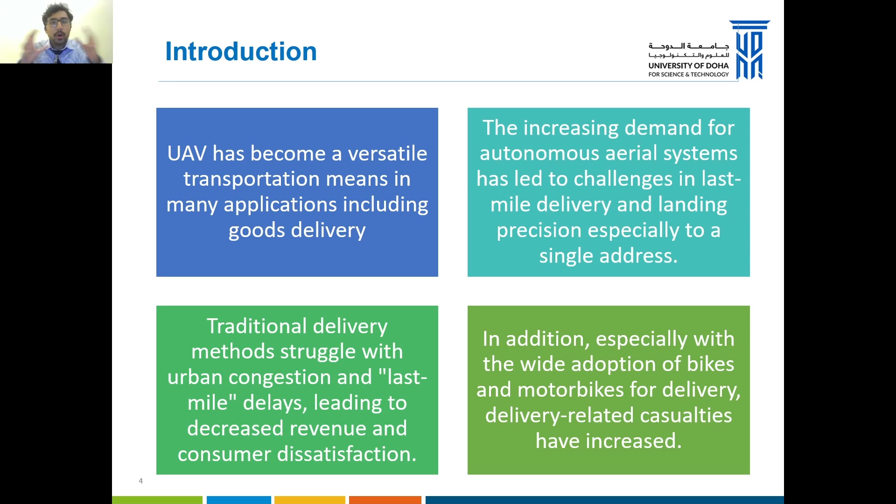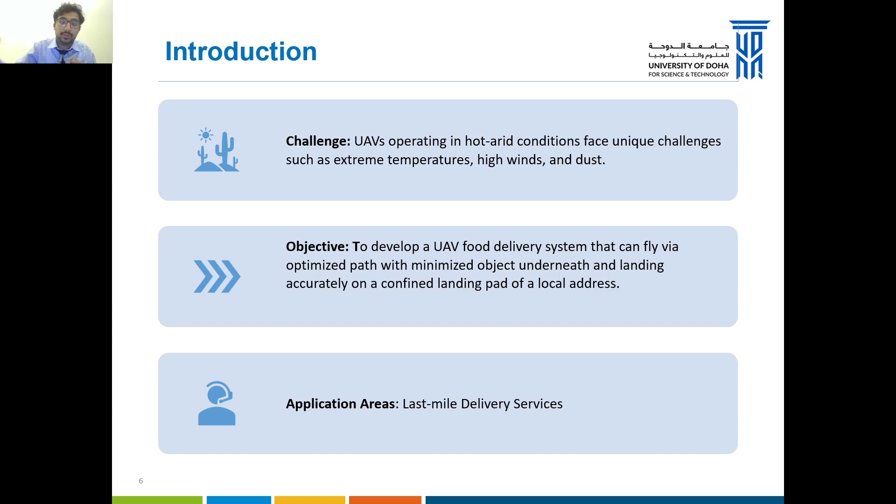UAVs are anything like drones, quadcopters, fixed wings, rotors, any small flyable vehicle. This is the application, the scope of our project. We are selling for goods and delivery services. The main challenge that we are facing is extreme temperature, high winds, and dust, especially dust, as that can accumulate and damage the most critical parts of the quadcopter or UAV. The main objective is to deliver door to door, so from the restaurant's door directly to the user's door. That's the main objective that we're trying to achieve.

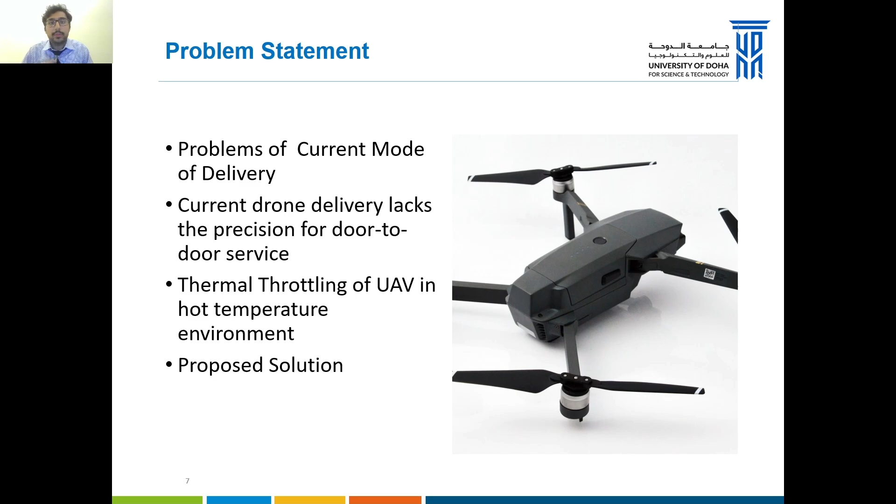The main problem with the current solutions for quadcopter delivery is that they're limited. They're limited to certain areas only, with Walmart in America being limited to certain zones, and Keeta in Abu Dhabi being limited to certain landing pads. Our main solution is to eliminate this, to be able to travel to the major cities with no problem at all, and to deliver to the door of a customer. These are the objectives that we are following to achieve this project. We are in the last stage, selecting the best hardware possible.

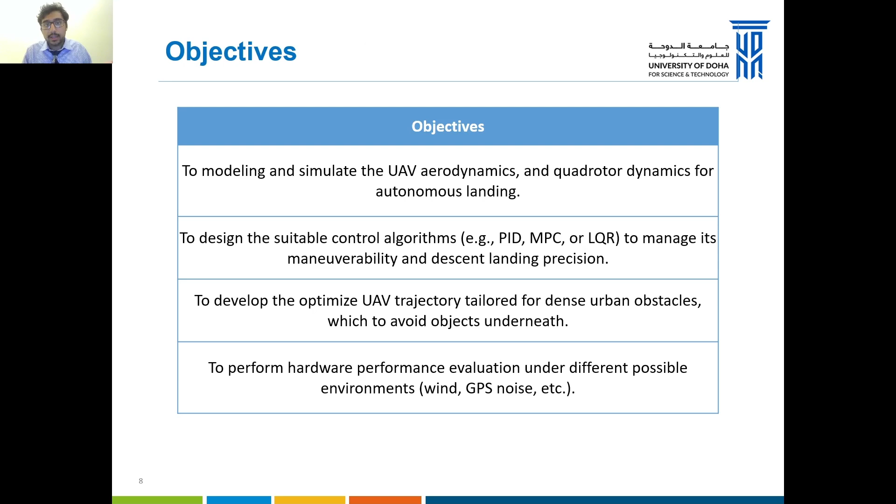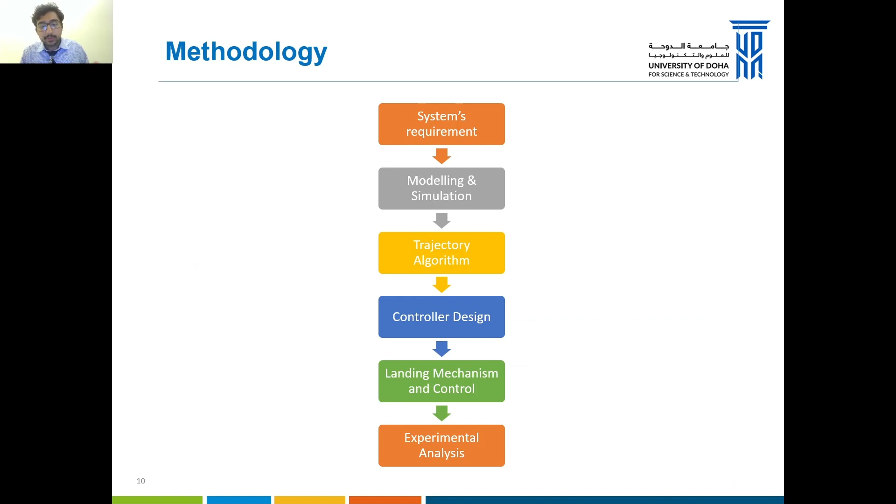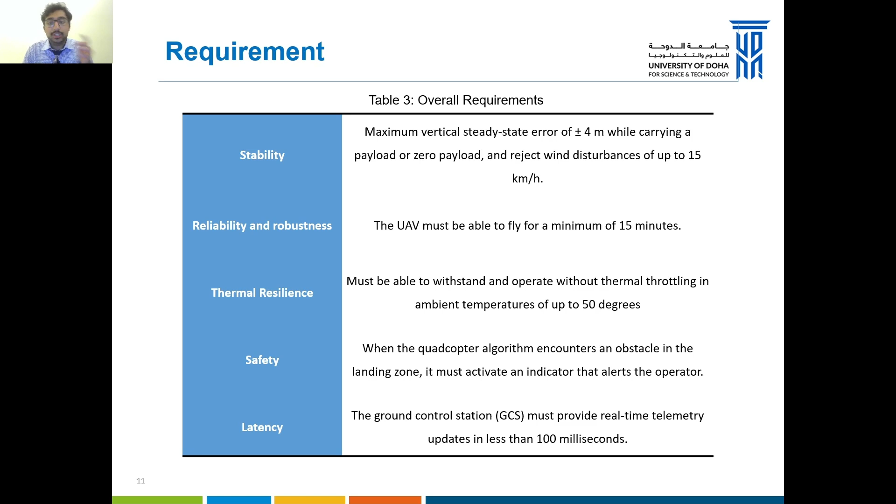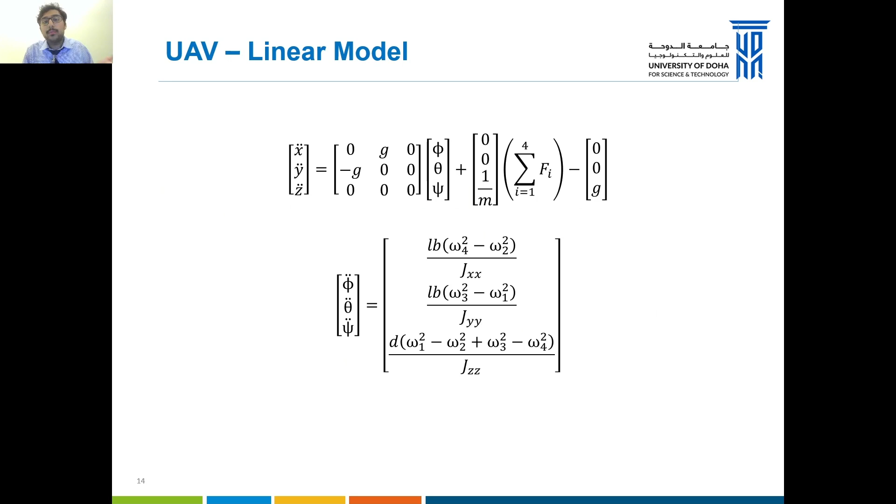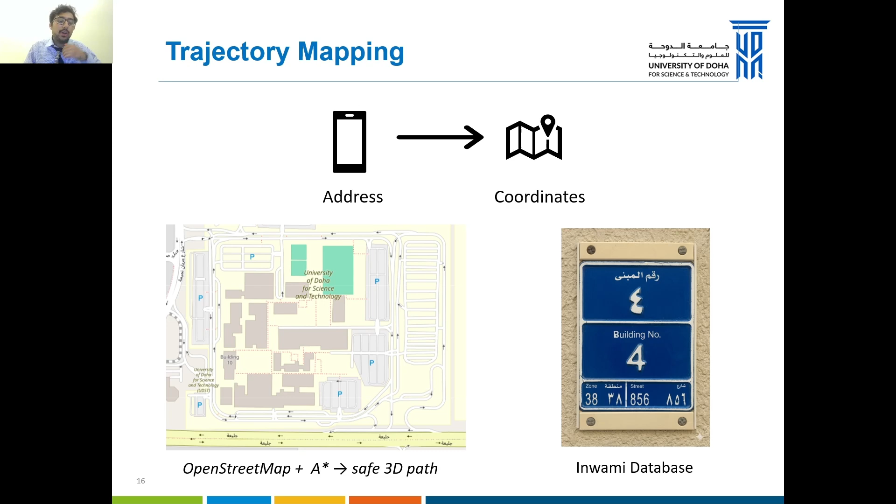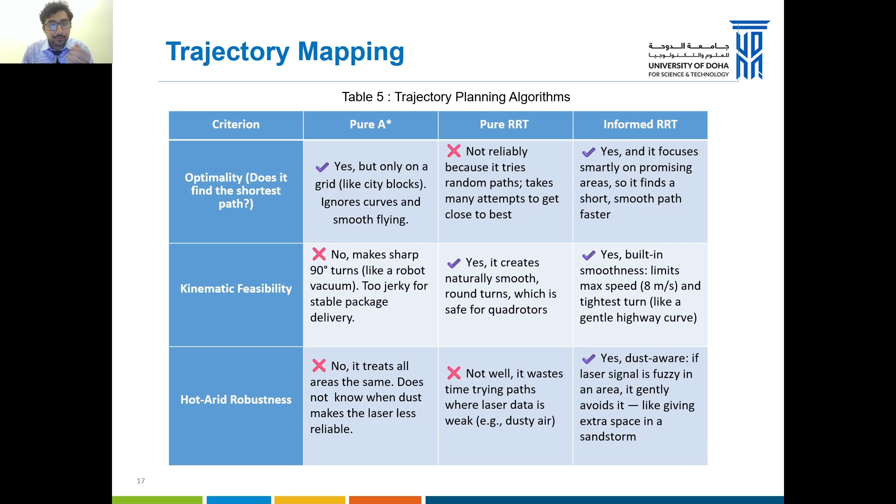The reason we selected A-star, even though RRT was better, as you can clearly see from this table, is because of simplicity, effectiveness and reliability, even though RRT and Informed RRT would have won in many other metrics. This is the LQR controller we selected. And the reason we selected this type of controller instead of PID or MPC is because of its overall simplicity, very similar performance to linear MPC, and superior performance to PID.

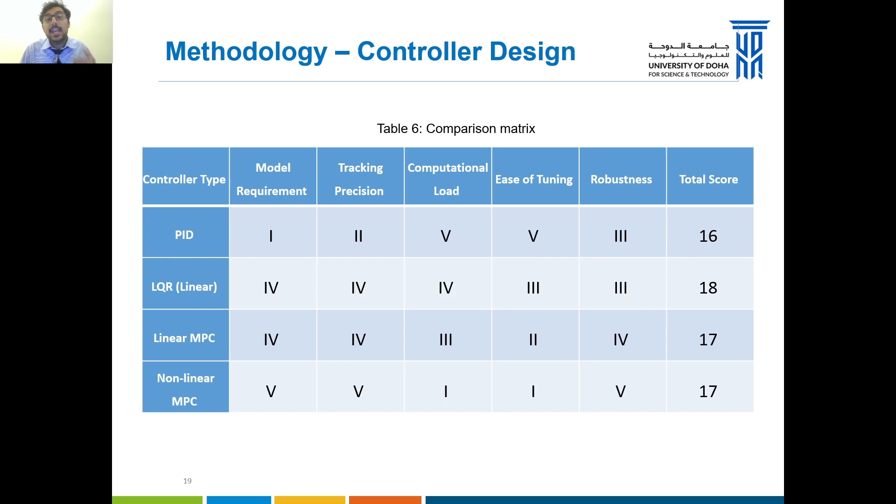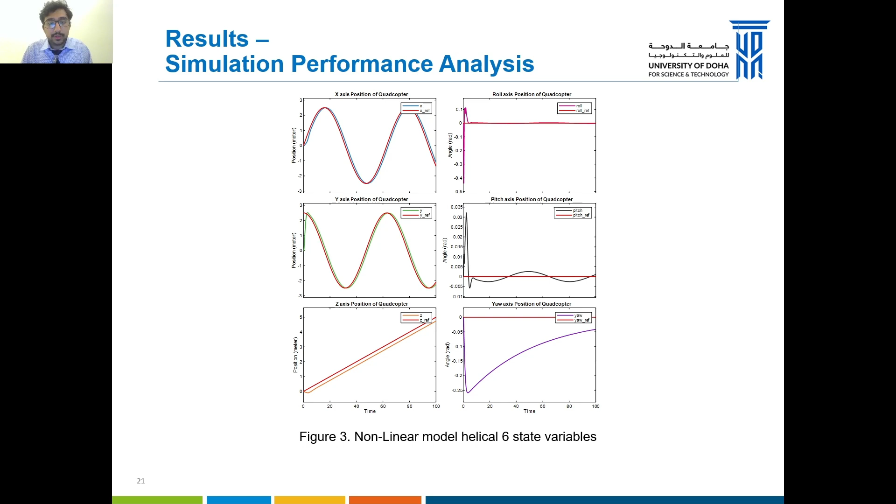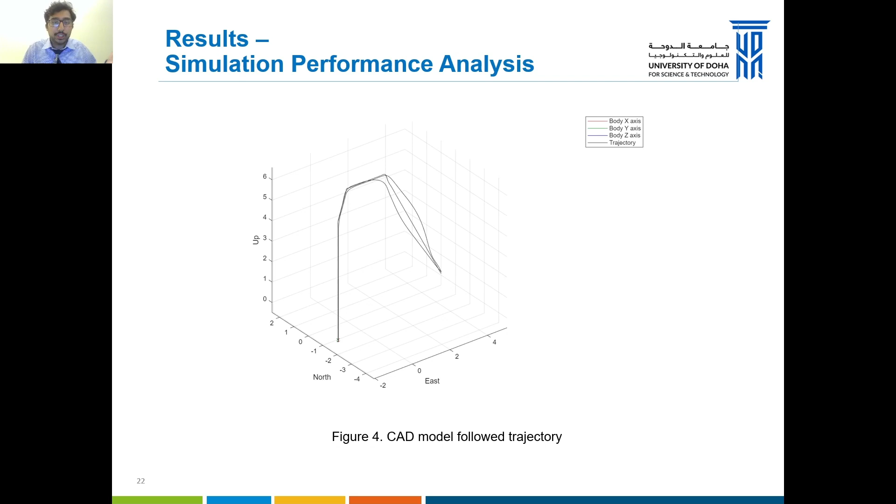This is the tracking performance for the nonlinear model on a helical trajectory using the LQR controller. And this is the result, as you can see, for the 6 state variables. Very good, very little error in the angles as well as the position. Same for the CAD model. The CAD model is not a mathematical model, rather a physics simulation model done in Simscape in MATLAB, or actually Simulink. And as you can see, similarly, very good results.

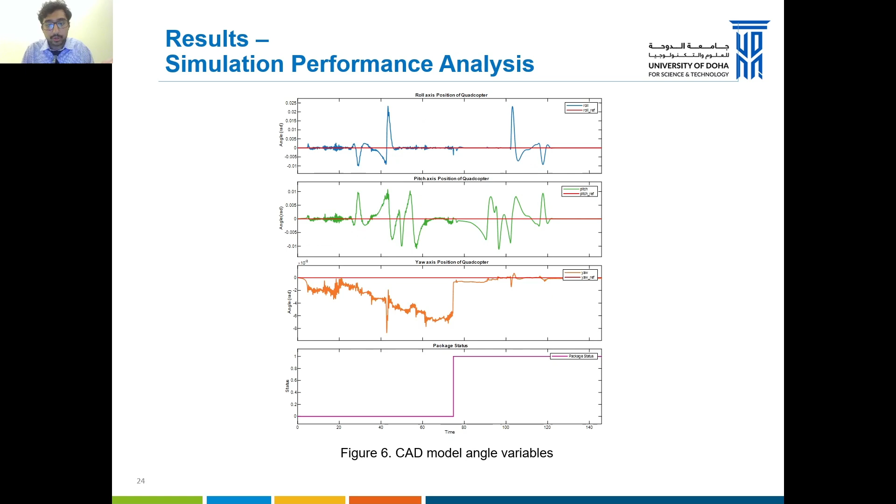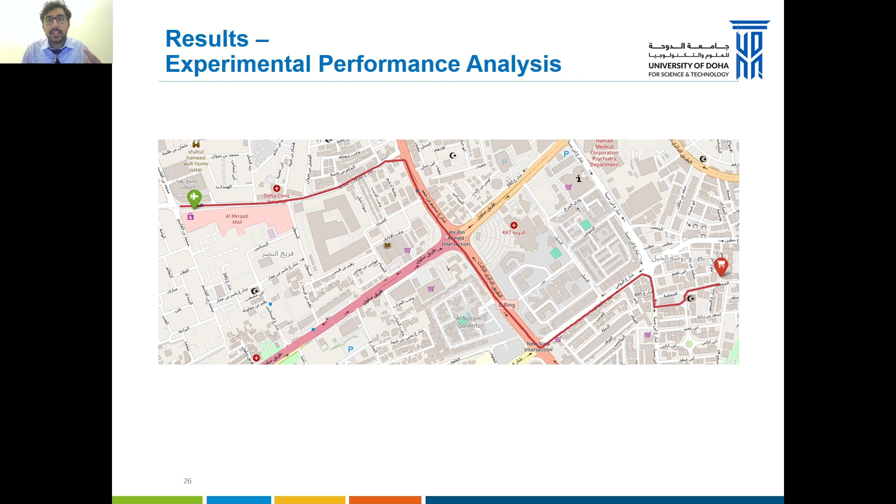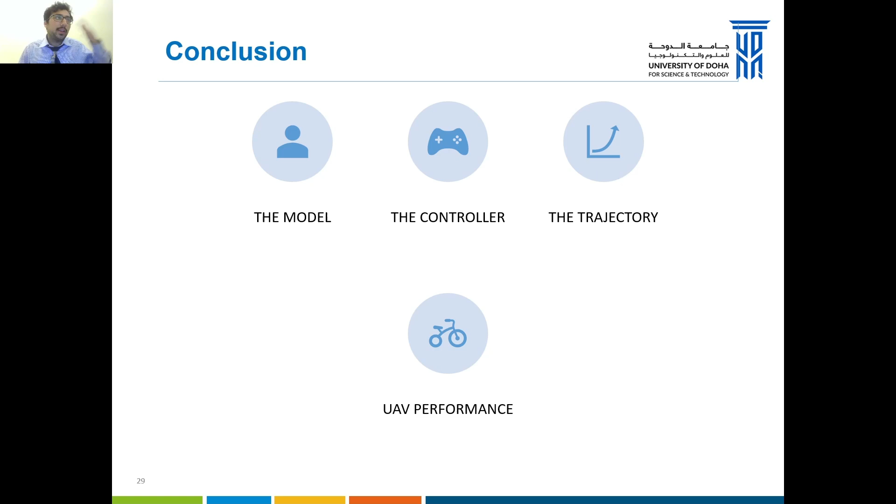These are all the resources required to achieve this project. We are eliminating the MATLAB and Simulink software and focusing more on ROS and Gazebo and open source variants and the hardware we have acquired. The main conclusion of this project is that we are able to achieve the model, the controller, and the trajectory, and the overall UAV performance in the simulation is looking good. Furthermore, we are looking for B2B collaboration with big businesses such as Keeta and Walmart in the future. Keeta is actually present in Qatar, so we can do it now.